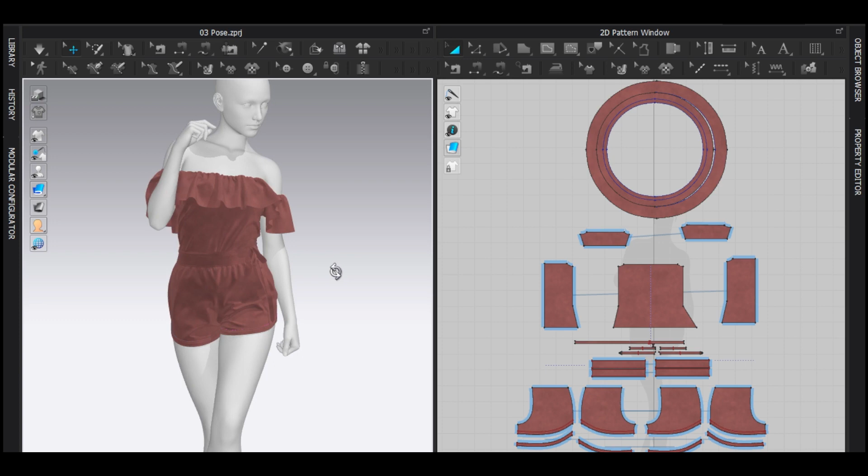This is the dress. This is for beginners, and it's gonna be step by step. So sit back, relax, and learn.

I hope you already have set up your avatar, and make sure the skin offset is below 1. I like to keep it 0mm.

I'm gonna start with the top design. As you know, probably every time I start with the basic block, and because this is for beginners, I'm not going to be using too much shortcuts. With the add point and split line tool, I'm going to add a point here and here.

And with the edit pattern tool, I'm going to select that and this and drag it down, and this one a little bit lower. So this is going to be my neck hole.

I'm going to smooth it with the edit curve point tool, and I'm going to smooth it here. So this is the armhole and this is the neck hole. And because the shoulder is kind of like a ramp, don't make this straight.

So I'm going to use the edit pattern tool and drag it down. Now select that, Ctrl C and Ctrl V, copy and paste, and in the 3D window, right click and flip normal. So you can see in the 2D window it just flipped, and place it there.

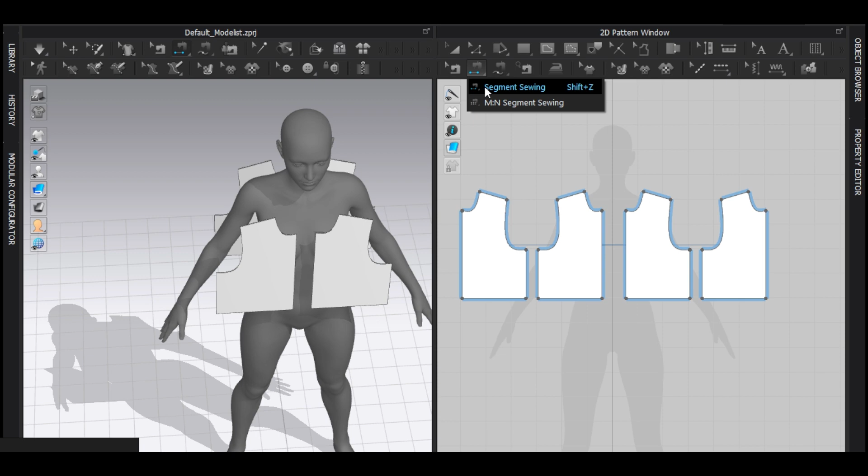Select both and hit Ctrl R to symmetric paste like that. It's very simple. Now sew it with the segment sewing tool. The front, you can sew it in the 3D window, in the back, on the shoulder, and just let it drape, and then sew the side seam, because sometimes the hands interfere with the fabrics.

Alright, so this is a basic simple block, and it just took like 2 minutes or something. Now I'm gonna modify it such a way so I can make this top, and it's really amazing because it has ruffles, and I love ruffles.

Anyway, try to make this a little bit baggy because I love a little bit baggy kind of top for this video. Alright, select everything with Ctrl A, and with the transform pattern tool just drag it like this.

You have to check your fabric though. If it is too loose, make it a little bit tighter. You have to make it a little bit balanced out. Don't make it too tight, don't make it too loose.

For this top design, this and this holes don't matter too much. Why? Because they are hidden underneath the shoulder ruffle. Still, I need to fix a little bit.

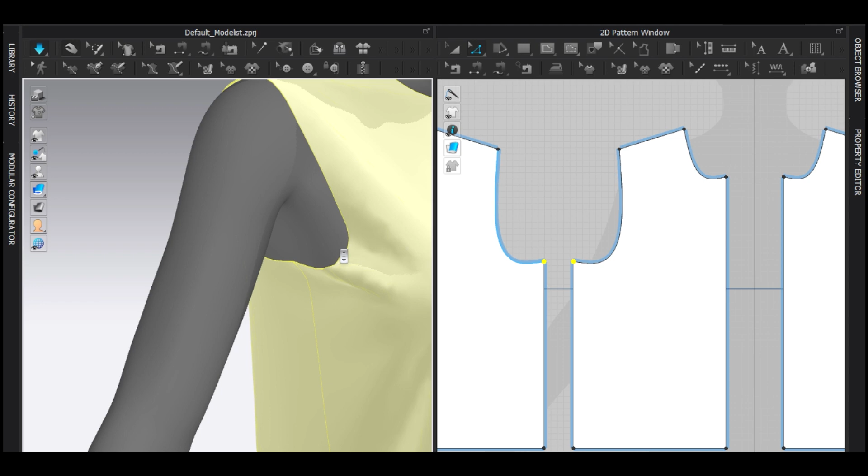Start with the armhole. So use edit pattern tool and just drag to select both and drag it up. And guys, you have to check your dress because it might be different than me. With the edit curve point, you can curve it as well as add curve point.

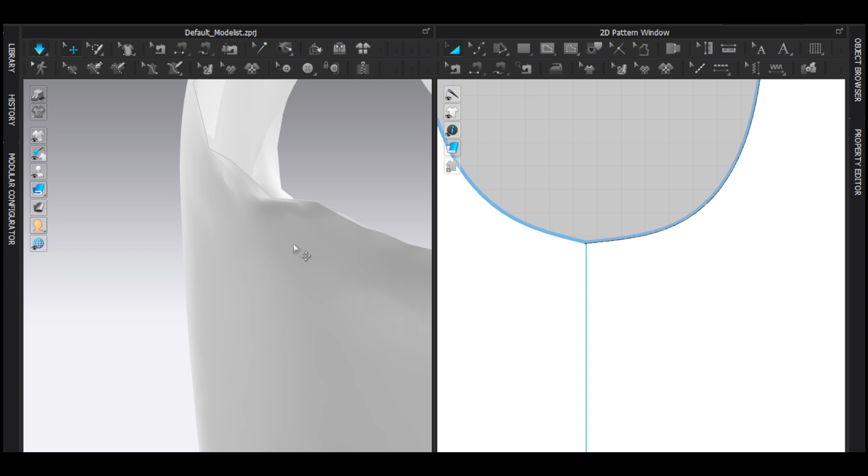So it's really amazing tool, use it often. Now just place it so it just snaps. You can see this area, it needs to be very smooth. Otherwise you will have this pointy thingy.

It doesn't matter here on this top, but it is a good practice to make it smoother. Just bring them towards this point and smooth this a little bit. I might make this a bit tighter, a little bit though, like this. And the back, fix it a little bit like this.

So I just used two tools. One is edit curve and edit pattern to edit this, and another is edit curvature to curve this curve point. That's simple. As you can see here, it's kind of tight.

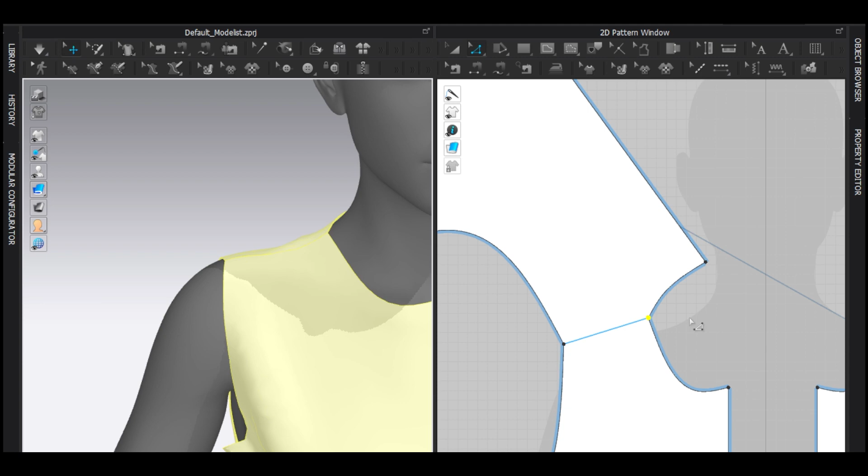It's really faster, believe me. And make sure this line should be a bit smoother. It doesn't matter because it will be hidden anyway, but still.

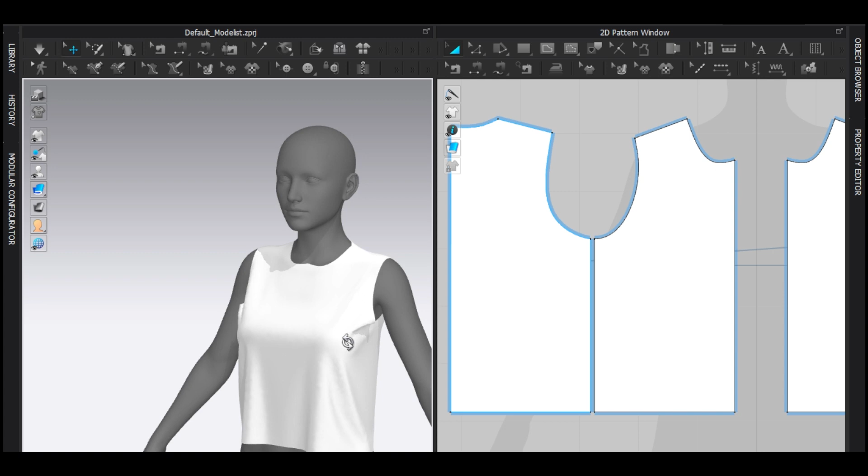Same thing to start, and I highly encourage you to use hotkeys. I will probably make a video of my hotkeys, but I don't think it's necessary. But let's see in the future, because with hotkeys you can make garments really fast, just really.

Now I will not worry too much about this area, the neck hole, because as I said again and again, it will be cut off and it will be hidden. I'm gonna start with the sleeve.

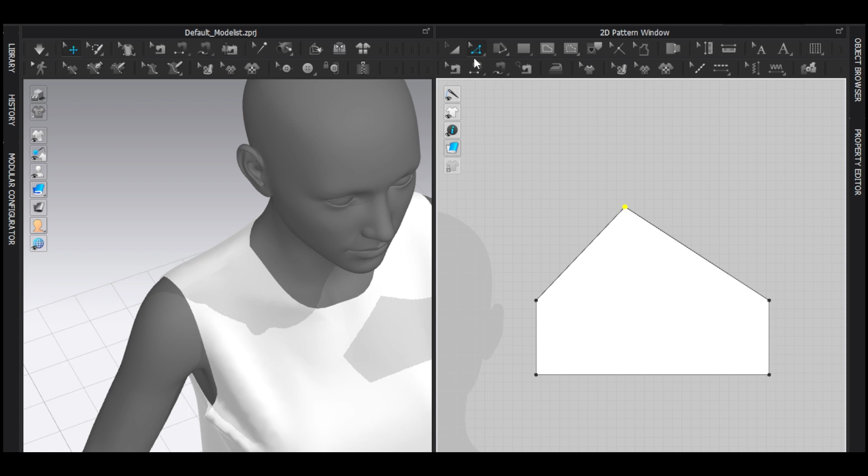So I'm gonna start with basic rectangle, and the way I make sleeves is just add a point near about middle, edit the point, drag this point with edit point tool, this one, edit pattern, and right click, convert to curve point, like this.

And with the edit curve point tool, just add a curve and drag it like this, and add another to make it a bit of volume. Same here.

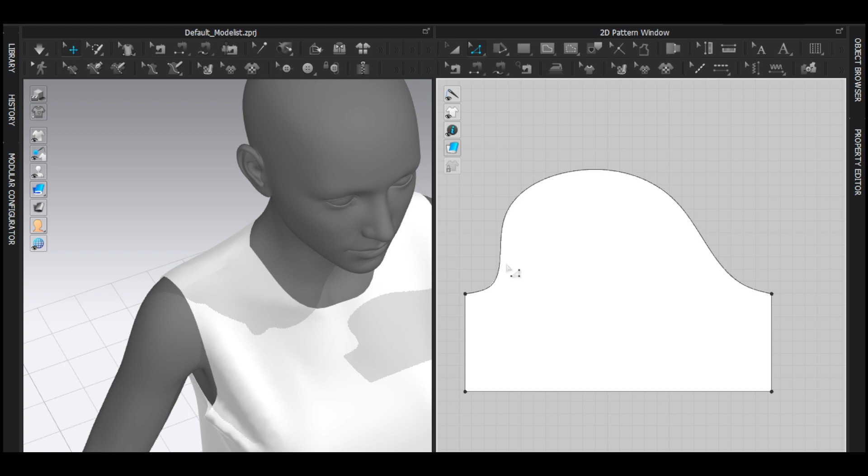You can always see the patterns, different patterns, like basic t-shirt patterns, basic sleeve patterns. Just see them and try to make them. It's more fun. I'm going to use the free sewing tool, which is here, and I'm going to sew it from this to that, and I'm going to hold shift and sew like this.

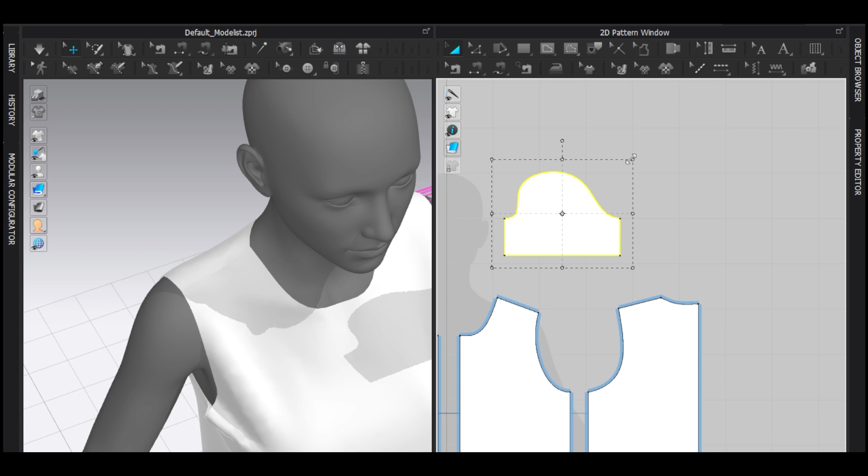It's very simple. With the edit curve point tool, with the edit sewing tool, you can see the measurements. It's minus, means it's smaller, so make it lengthier until it just matches the 0.2 millimeters. Perfect.

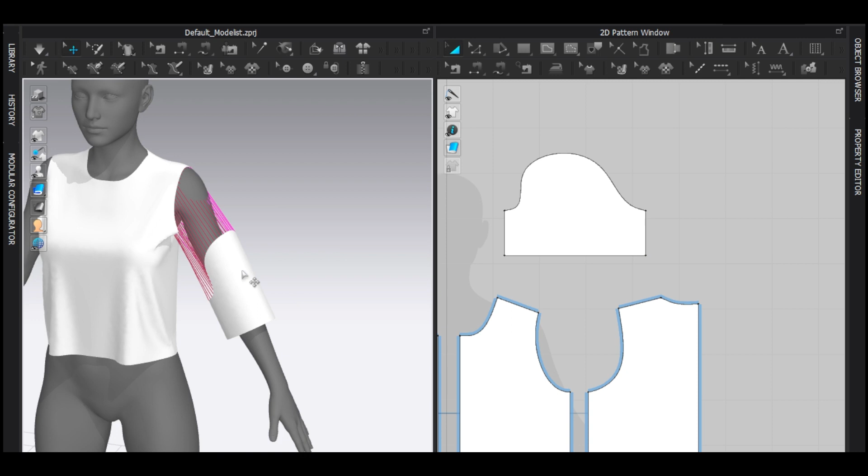Now select this pattern, and here you can find show arrangement point, or you can press shift F. I think it's default. Sew it and select that, hover over your mouse here and click it. It will just snap it there, and you can just turn it off. Just make it a bit closer and simulate, of course, and sew it here like that.

I did segment sewing tool, segment, sew there. Sleeve can be tough, but it's not tough. Yeah, you can adjust it by seeing this area. Again, it will be another video when I make pattern making videos in future. I will talk in details about that, but now let's just leave it like this.

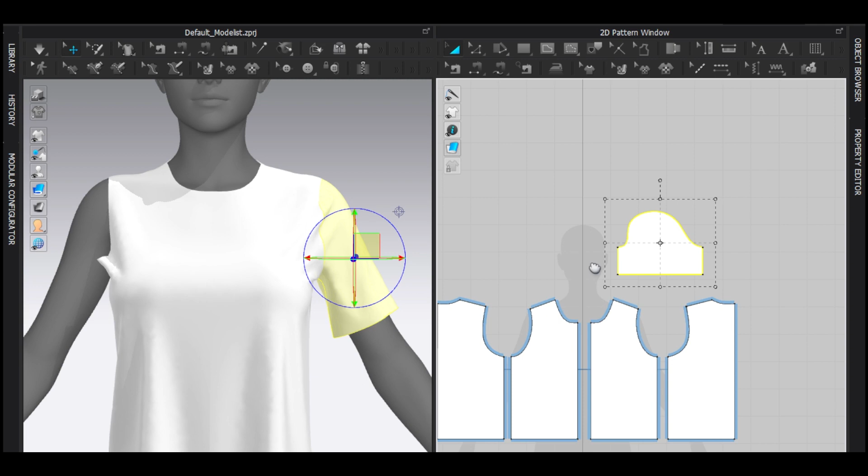This is the basic sleeve, and I'm going to select that, Control D to symmetric paste, and here just simulate. So it doesn't matter, because again it will be hidden.

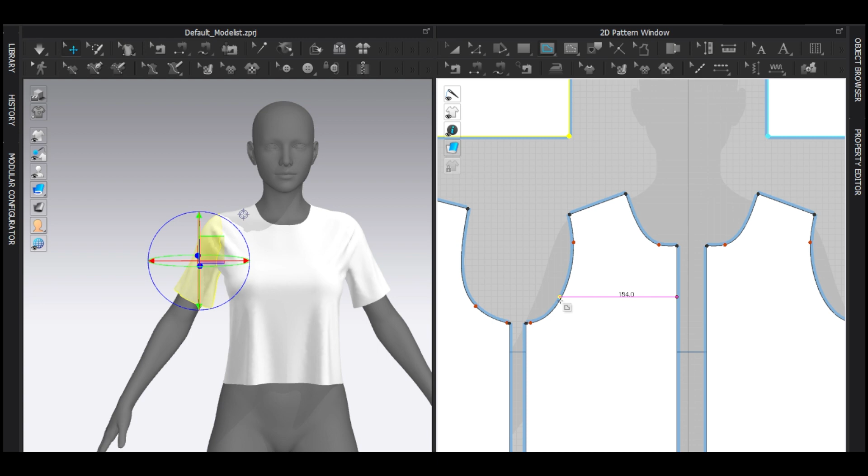Now what I'm going to do is I'm going to cut probably right about here. It's going to be tricky, but it's going to be simple. I'm going to use the internal polygon line tool and just cut it maybe around here, and just direct line that like this. This area, by the way, is this area, where you want to make the ruffles.

Maybe here seems fine. You can pull it up, you can pull it down. It's just a matter of preference. Now when you drag a line like this, select this line, right click and cut.

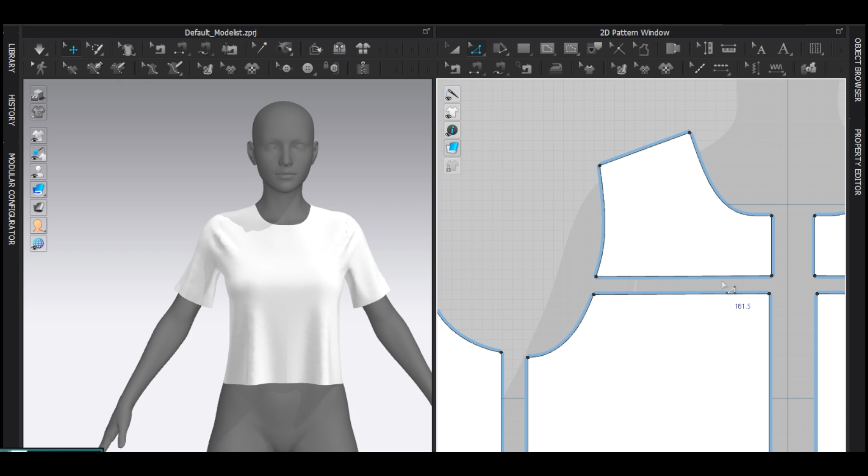Now when you cut a line, if it is already sewn, the sewing will also be cut. So this is the benefit. So here, as you can see, this sewing is cut like this.

On the back, I'm gonna drag a line like this, probably here is okay, I guess, and again cut, right click and cut. And you can just delete this because you don't need them. Now it looks kind of odd, right?

Yeah, because you also need to cut on the sleeve, and because you cut here, the sleeve sewing is also cut. So as you can see here, this is the starting point of the sewing.

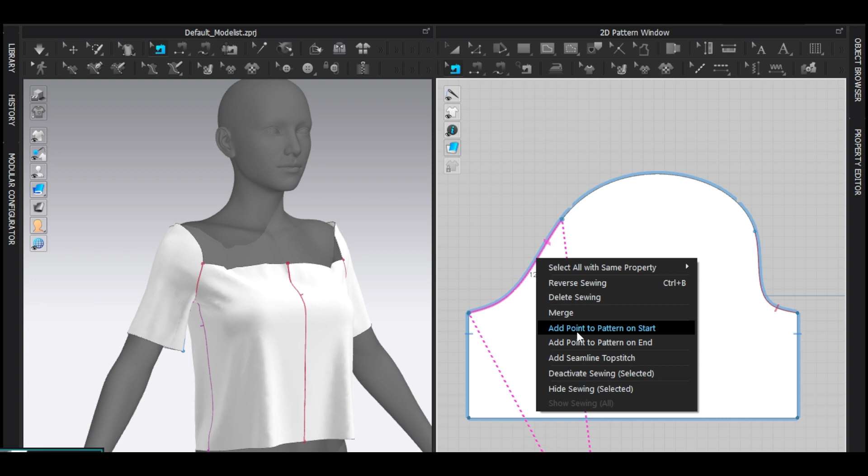So I'm going to add a point right about here. Right click on the sewing with the edit sewing tool, add point to pattern on start. Because it's start, so it will add a point right about here. And another here, as you can see, is the end. The long tail is the end and the short one is start.

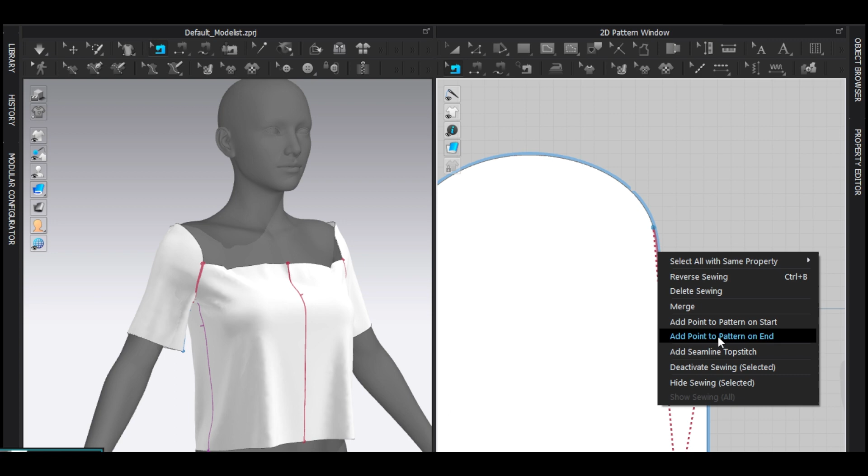So I need a point here. That means this is the end. Right click, add point to pattern on end, and it just adds 2 points like this.

So I'm gonna use polygon line tool. From this point to that point, I'm gonna just add a line and then cut again and just delete. So it is just amazing, as you can see there.

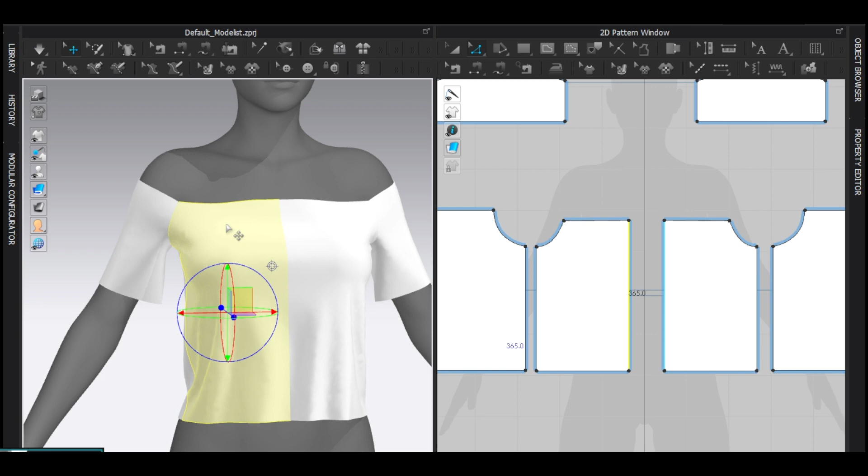It's not very tight, so I'm going to make it a bit tight on the front. Not too much, but a bit tight so it will hold there. And also the back.

Sleeve, I don't want that lengthy. And I'm gonna make it a bit downish so it can rest like there. This tension though you will have because of the arm position, so it's really recommended to use, like, the more A pose you have, the better the result will be. The more T pose you have, the worse result it will be.

So never work T pose in Marvelous Designer. Try to use A pose or very lower A.

And I'm going to make this a bit longer and maybe a little bit shorter. And I will not adjust this because I want this bit loose, so it will make this kind of amazing folds when I make the shorts.

Alright, perfect. That's good. I'm gonna add shoulder ruffle. It's very simple. You just need to add an ellipse tool like this and then adjust the location of it. Maybe a proper place like this, bit bigger like that.

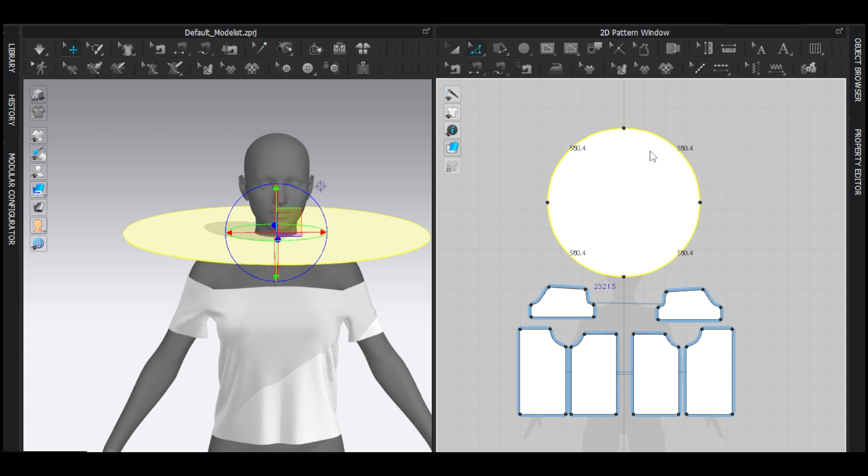Yep, perfect. Now select face, right click, and offset as internal line. It doesn't matter, maybe 50, and okay. Then right click and cut under this middle. So you will have a hole in the middle.

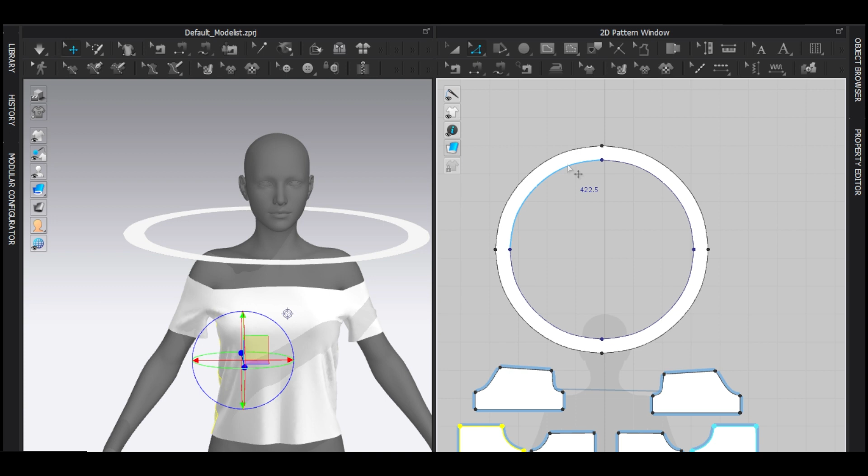Alright, quick tip. Just double select on one of the segments to select every segment when it's outside or inside. It's really better. You can even use here. It's really easy and fast. Now another quick tip, which is to use the transform point and segment tool.

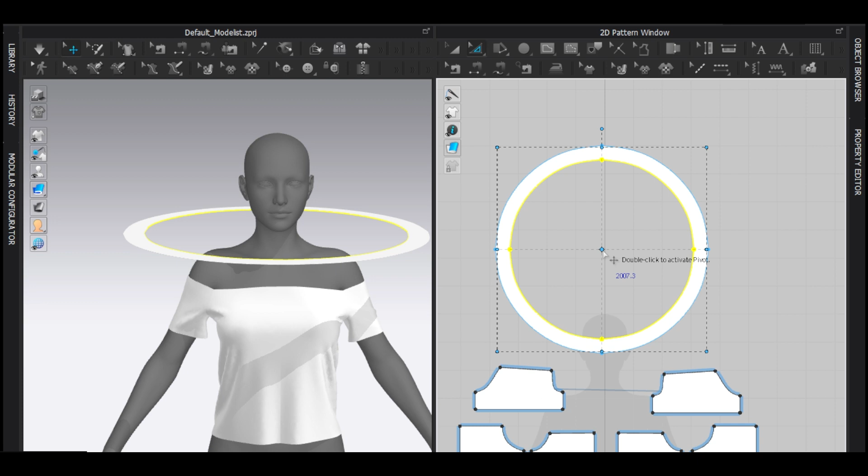So if you use the edit pattern tool, there's nothing you can do, you cannot make it shorter. So use the transform points and segment tool instead. If you do that with the other tool, it just makes it even worse, right? Yeah, so double click in the middle to activate the pivot, and now if you scale down, boom, it's amazing.

Now sewing time. Freeze this top, right click and freeze. Watch carefully. With the free sewing tool, you have to sew from here like that, and when you sew it like that, just check the sewing where it's going. It's from there, and as I roll my mouse, it just ends there. So you have to sew from here. You can see on the 2D window like this, so it just jumps from this to this.

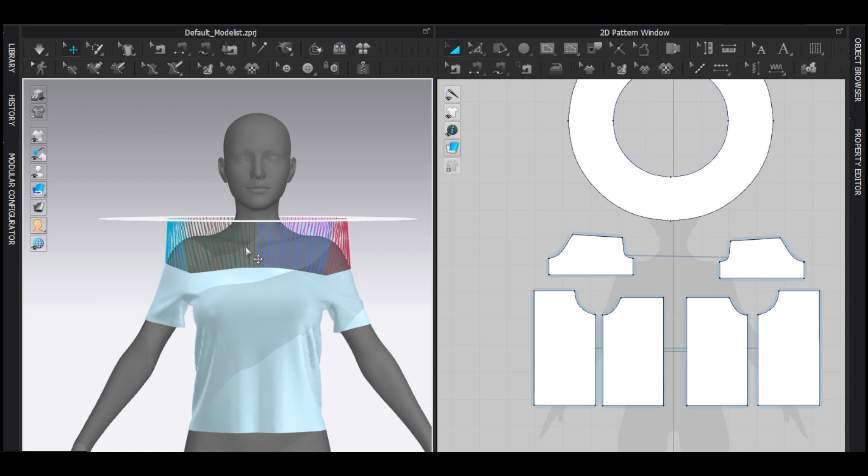It's really amazing, so you can just check it, like this in the front, and then again like this, and on the back. It's tricky, but it's simple. So like this, hold shift, like this, like this, like this, like this, like this, and like this. Make sure every sewing thread is straight. If it's not, if one of the sewing lines is reversed, it will show you like this and it will be chaos. Just trust me. And of course simulate, so you will get amazing ruffles.

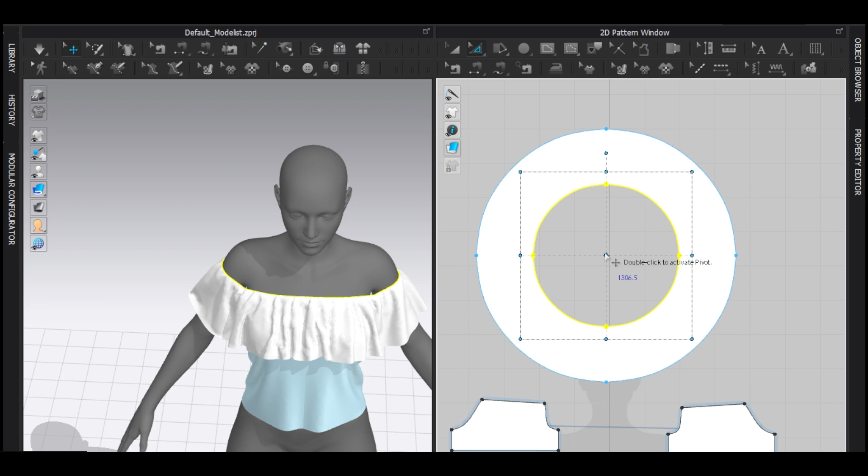About the ruffles, there are some easy tricks you have to understand. The bigger you make this inner circle, the more gather, the more ruffle you will get. So yeah, anyone can know that. I'm going to make it a bit bigger, it will be more gathered. The more means better, yes.

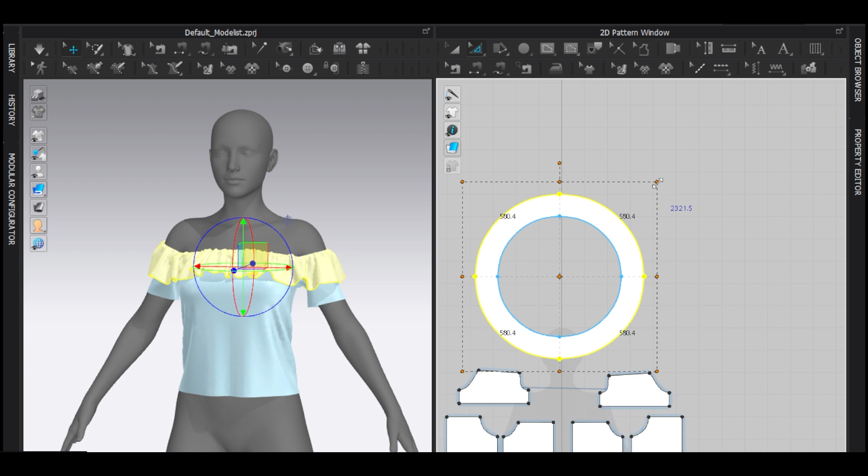Now I really want to make these ruffles a bit bigger so it will hide the sleeve. So I'm going to select that with the transform point tool, just double click in the middle and then drag it up. Remember to double click, otherwise it will be really bad. And let it drape. There you go.

So select everything with Alt A, Control A, and unfreeze everything, and then simulate again. So it will just release a bit of fullness there.

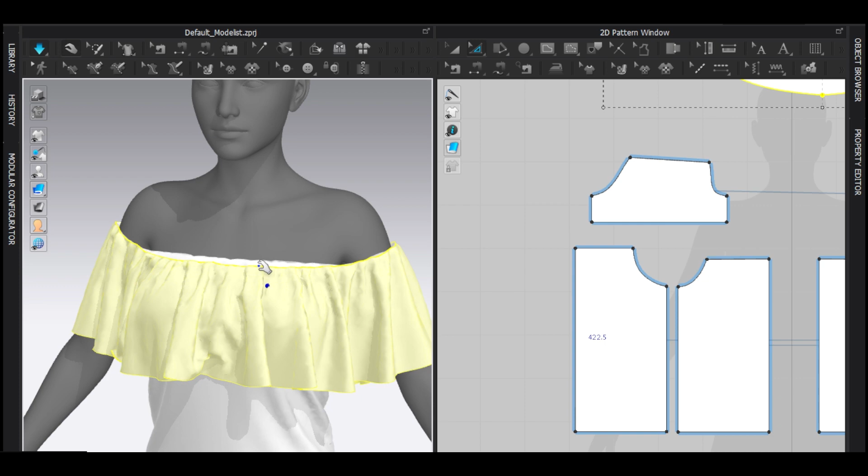Don't make it too loose, by the way. If you get this kind of problem, it's probably because the dress is not very tight. You have to make it a bit tighter so it will hold the shoulder and it will not drape too much down. Yeah, it's not too much, so it's better. If you want, you can add elastic here, but I don't recommend it. Just make it a bit tighter, it will be fine.

Let's work on the shorts. I'm kind of bad at making pants, but I'm learning, and it's not very bad, although it's a gathered shorts. Anyway, before making shorts, first select everything and freeze it, and make sure the layer of all these patterns is -1 or below 0.

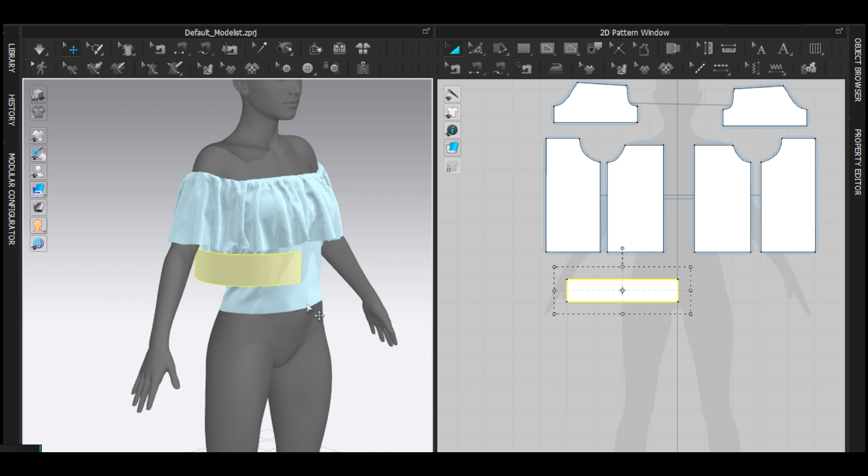And then I'm going to add a waistband, just like this, a single rectangle. Again, with Shift F, the arrangement point, select this waistband and click on the waist so it will just snap there. Control D to symmetric paste and segment, so front like this and back like this, and of course simulate.

But guys, if you find this problem - I didn't find this here - sometimes here, because it is not merged, this thing will look a bit odd. If it does, just right click with the edit sewing tool and merge. I'm not going to do that because it's fine.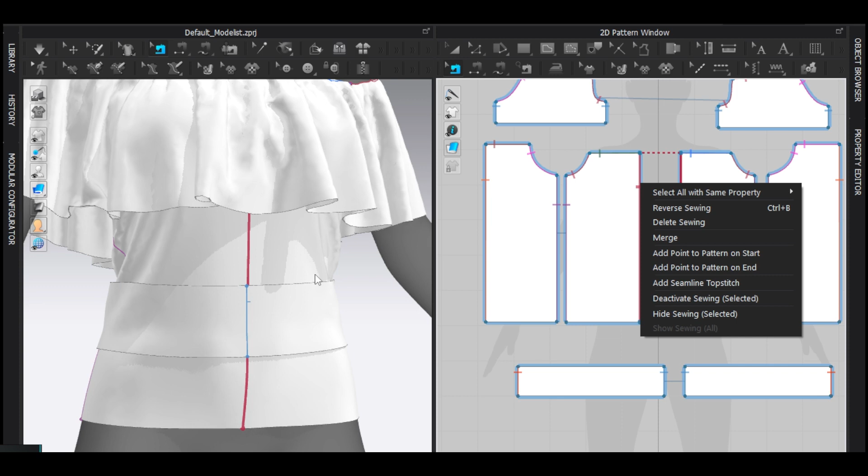So I think I'm going to make it a bit tighter on the back. Yeah, I think that's it. I really love these gathered folds, so it's great.

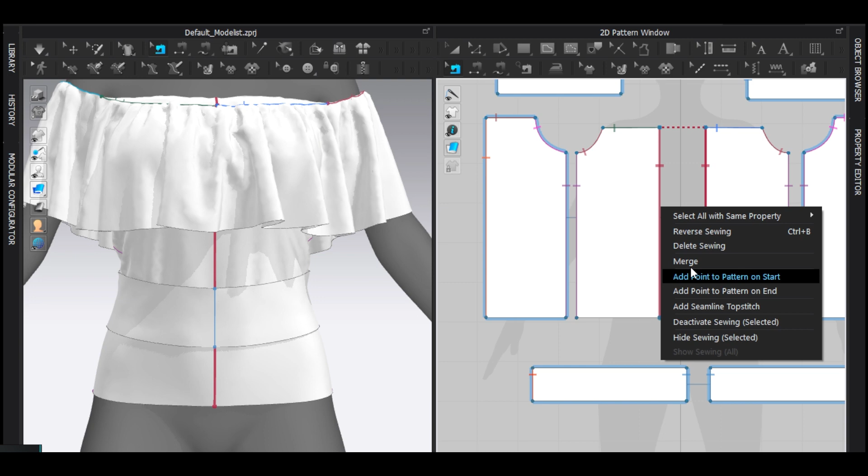I might merge this, because before merging, right click and remove linked editing and then merge it, and then delete this, because I want this as a single piece of fabric. So I might make it a bit tighter. I'm just experimenting with you guys, so like that. It looks good for now.

And again, freeze everything except this one, freeze this one also. The waistband is a bit wider.

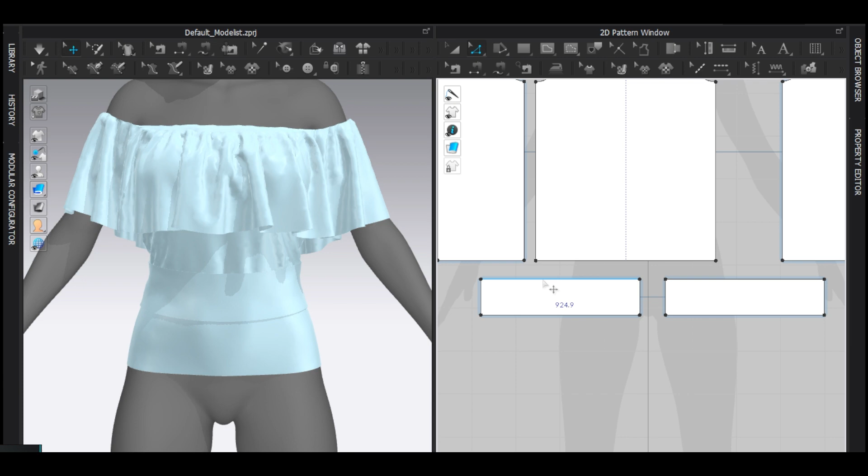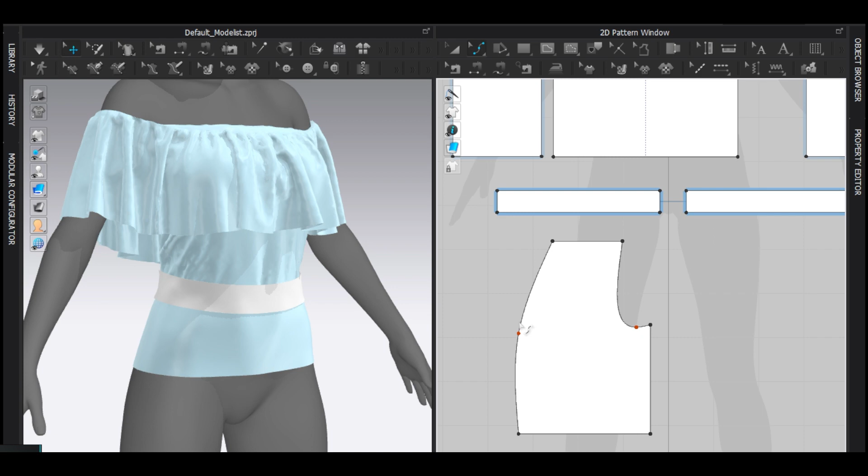Now, to make a pattern of the pants, it's similar to the top design. Just add a rectangle, add 2 points like this, drag it down like this and also like this, and just curve it, make this a curve-to-curve point like that, and make this a bit inward and this one a bit downish, and this one probably a bit narrower and a bit smooth, and maybe like this or like this. Now this is a pants pattern.

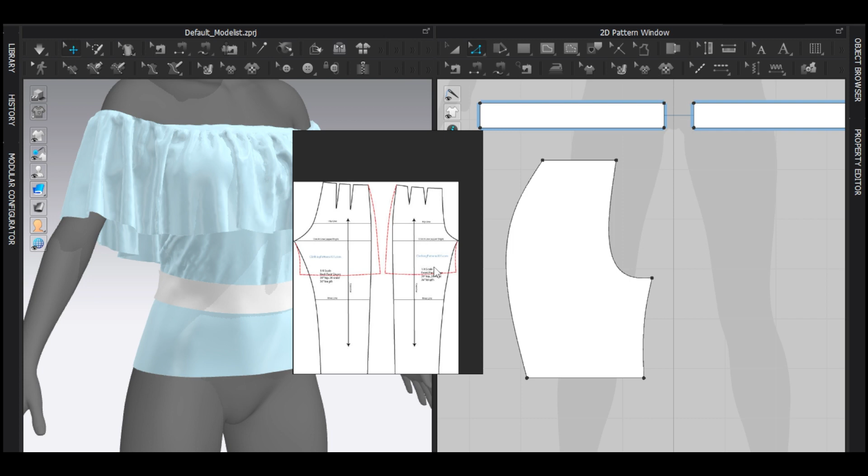Forget about that, there are darts. Just see the silhouette of how it is looking and try to mimic that.

Once you make it, Control C and Control V to copy and paste, and in the 3D window, right click, flip normal, and position it behind the character. Just adjust this location a bit, and Control R to symmetric paste like that.

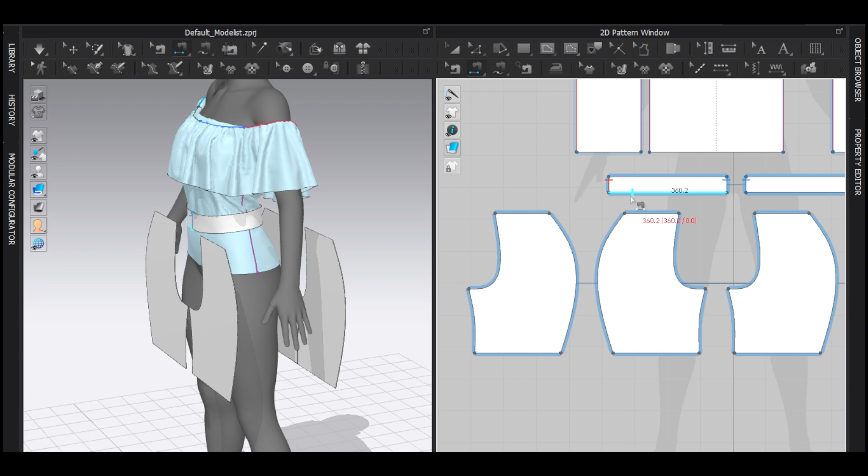So it will be a gathered shorts because it's easier. I'm going to make this a bit wider, should be wider than the waistband length. Now with the segment sewing tool, just click that while holding shift, click this and click this.

Probably freeze this and simulate. So yeah, there is no gather, so I'm gonna make it a bit wider because I need a lot of gatherings on that area, and it's not still. Yeah, I'm starting to see gathered a little bit, maybe a bit more.

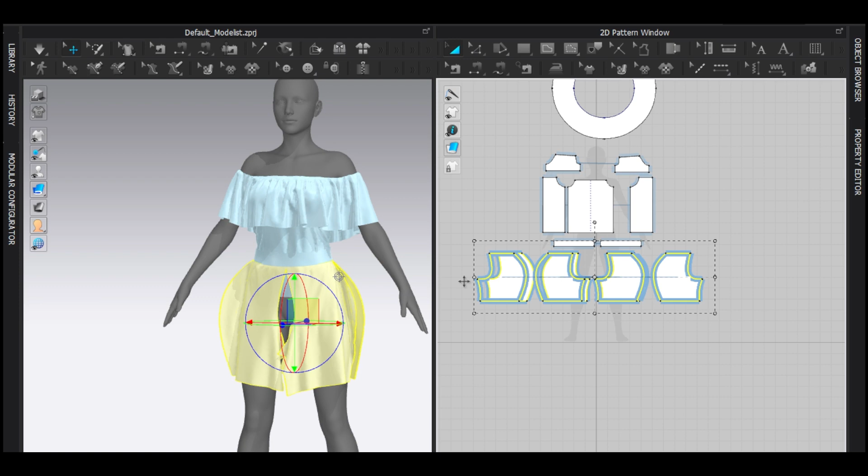Yeah, maybe like that for now. You can adjust this if you think the pattern looks a bit weird. You can adjust those, there's nothing wrong with that. You have to make this a bit wider to have gathering.

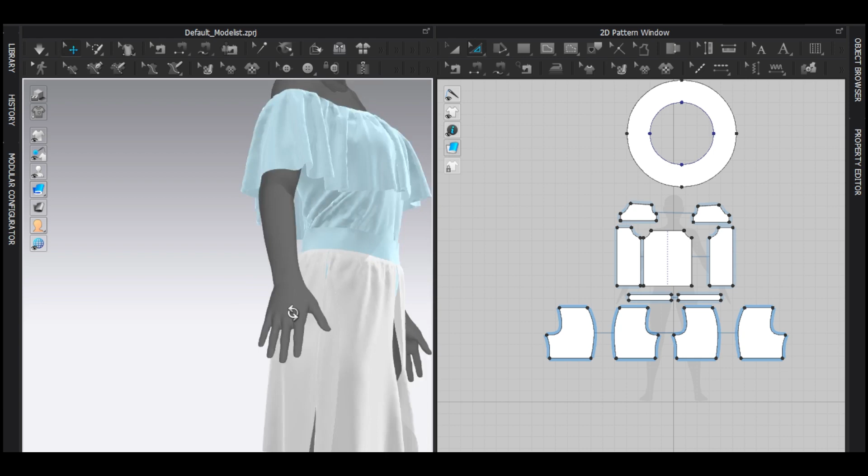Yeah, let's see how it's looking. Now I'm gonna sew it, segment sew it like that and like that, and simulate to see how it's looking. First of all, it is way too downish.

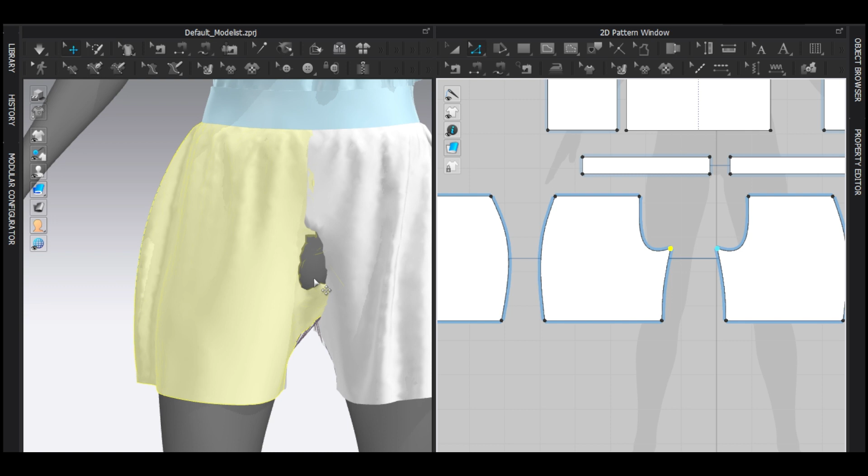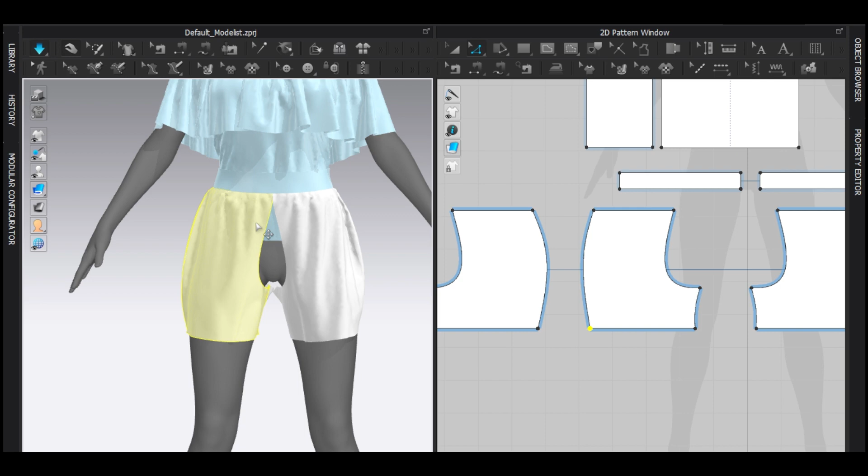Pay attention to this area, don't make this over this area, just try to be mindful. There should be a bit of gap on this area because you will not want to wear a pant which is way too tight. Even especially on this area, it will be painful. So I'm just adjusting side to make not that fluffy looking pant.

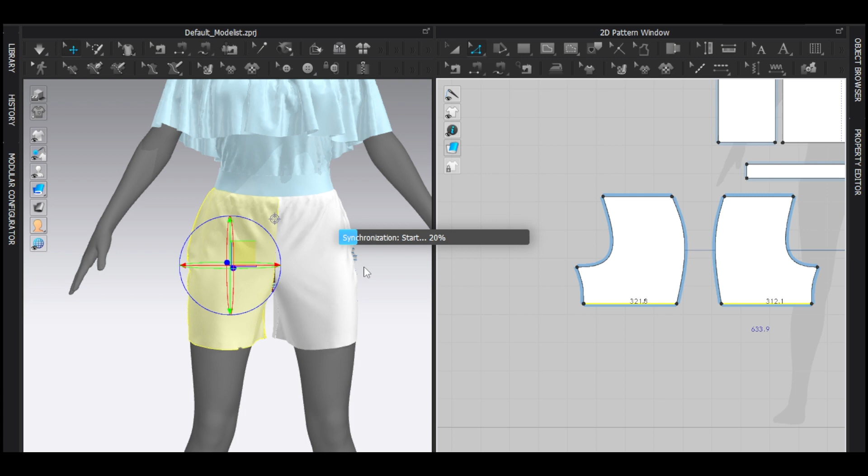Now select, sew this and sew like this. Simulate and see how it's looking now, and then I'll decide what to do. Let's make it a bit down and this one a bit down, and because it is gathered, make sure this area looks good and make sure this sewing it's good or it's the same.

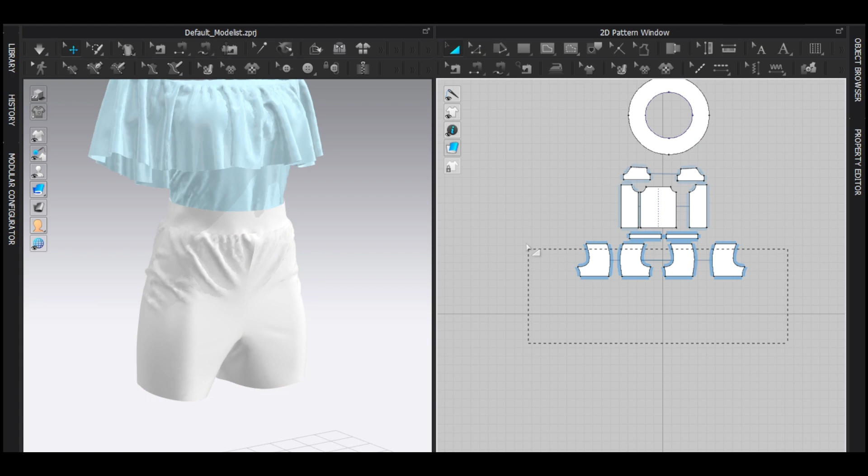All right, unfreeze that, simulate. Yeah, it looks kind of odd, but it will be better, trust me. I might bring this whole shorts a bit down, freeze everything like that, and probably we'll just adjust a bit like that. You have to be concerned on this area when you make pants like that.

Now what I'm going to do is add a pose, and then I'm going to add details because pose will make the dress significantly better. See, I told you. Now there's one thing to consider, which is the fabric preset.

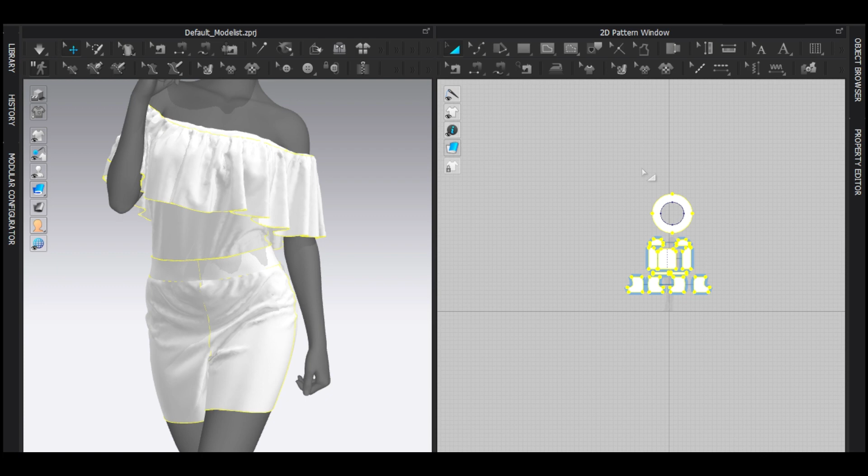I want to make this, well, let's make maybe, I don't know, maybe a stiff fabric like taffeta. If I find like this is very stiff and it will probably look odd. Let's check it. It will give you, it's just like a paper-like fabric. It will look very bad.

Anyway, enough joking around, I'm gonna use maybe 50 poplin. Let's add this, it's a bit lightweight, but let's see. Yeah, I think it looks good. This one is not very stiff, but it's lightweight, that's why it's just floating like that. But I like it, it's good. I mean, when I reduce the particle distance, you will see the magic.

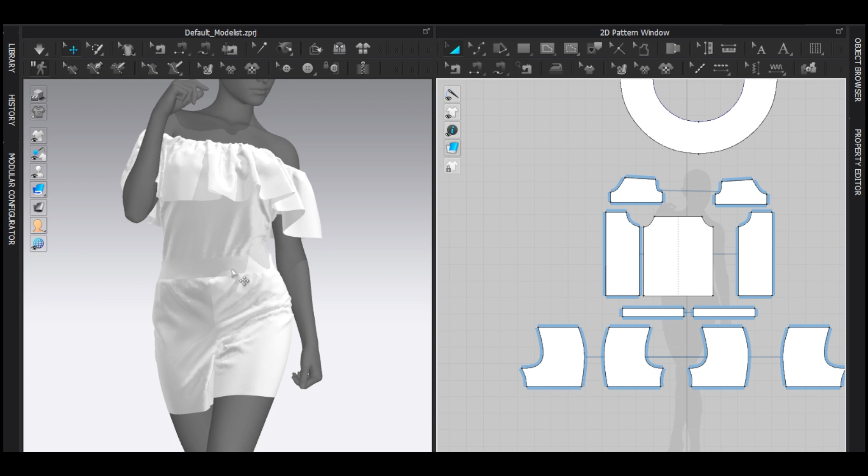Now let's make the waistband a bit better. You know how, if you watch my previous video. First, just merge it.

Before merging, always try to remove linked editing and then merge, and just delete this one. Don't worry, the sewing will be there. This is the magic of virtual fashion.

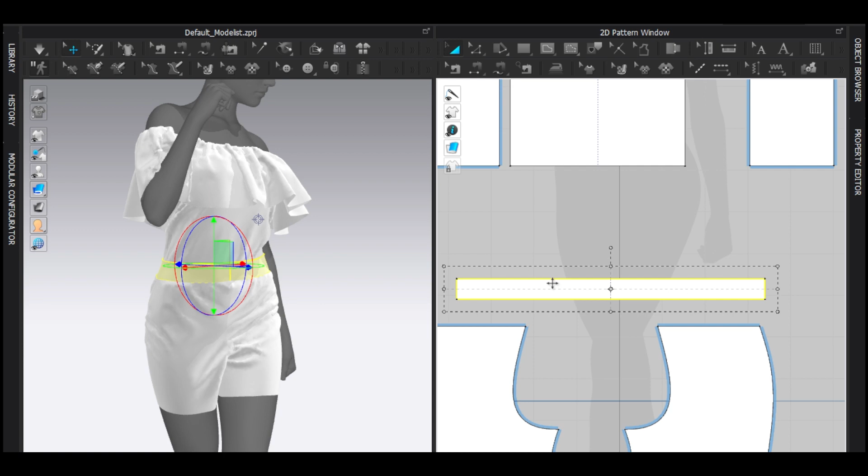All right, right click and layer clone over, so you will have another fabric on top of it, and there's a couple of things you have to do. First, right click and remove linked editing, and then delete the sewing which comes with the edit sewing. Now segment sew top with top and bottom with bottom, and like this.

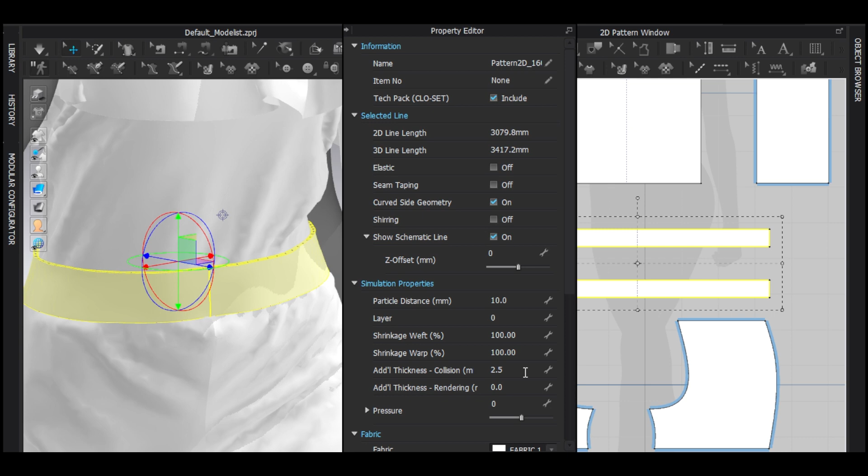Select both and decrease the collision thickness, maybe 1. 2.5 was way too high, but it depends on the, well, there will be a problem, and I honestly don't know why CLO does that. But anyway.

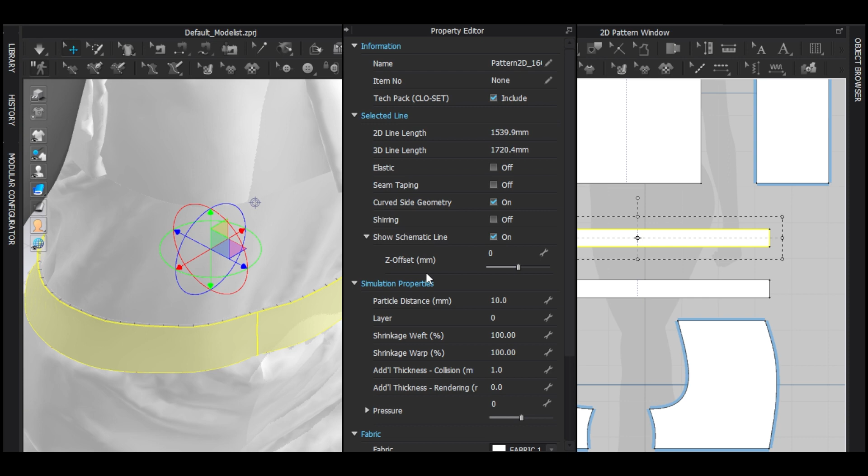Select that, first check this fabric, which layer it is in, is 0, so it is on top, make it 1. I really don't know why this does that. I mean, it will just freak out so much and it just ruins my happiness. Yeah, and now we can just make it 0, 1 like that.

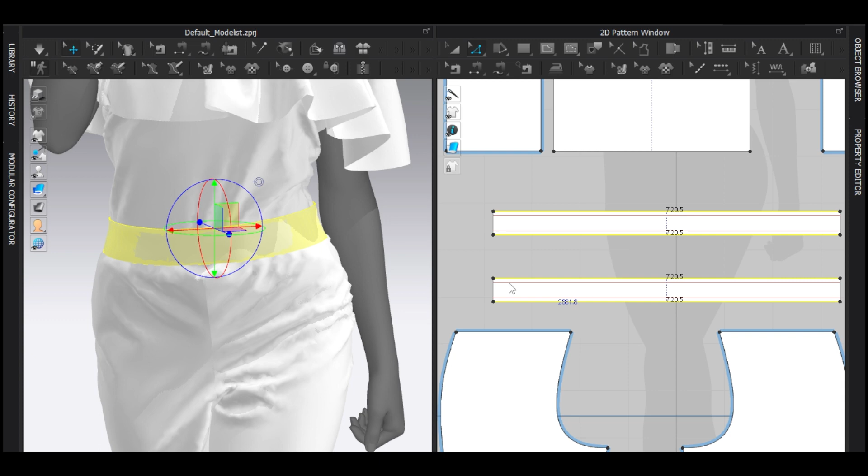Now select this, right click and offset as internal line, maybe 5, you can see here, or maybe 6 or 8. 8 looks good. And then sew it on top and on the bottom, and you will have amazing stitches.

You know, when you actually sew it, it will give you the stitch. So this is the stitch. Now you will not see it until you reduce the particle distance so much, maybe 3, and now you will see it very clearly. See, it's great, right? Yeah.

Well guys, I will skip this ribbon because I will be honest, I copied this from one of the CLO 3D's videos.

You can just search how to make a ribbon in CLO 3D or Marvelous Designer. It will be similar, because this kind of thing I really don't like to make in virtual, since it's more tricky than in real life. I want virtual fashion to be simple, not tricky. In the future, if I find a simpler, non-tricky process of making ribbons, I will show you, but not now. Go ahead and watch the CLO 3D official channel.

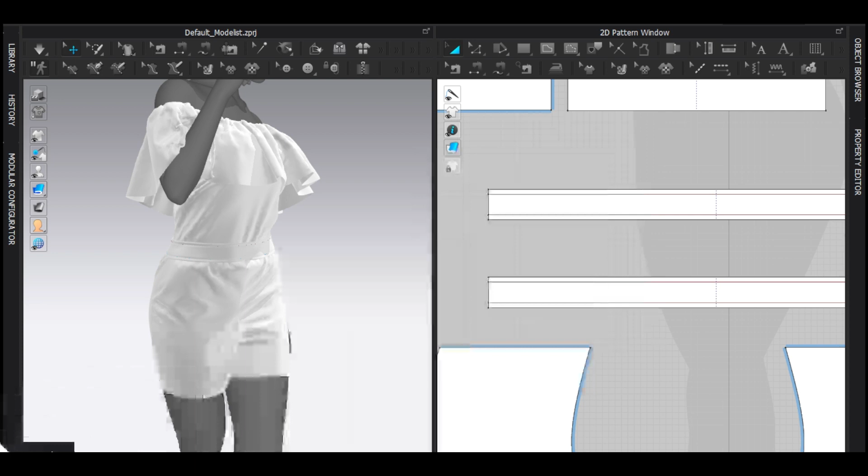As you can see, this shorts has an interesting shape on this area, so I'm going to make it. It just makes it amazing. So if you don't know, or if you don't find which fabric it is in the 2D window, you can always click it.

It will highlight, but it will also give you a blue dot in the 2D window, so it's amazingly helpful. Select both and just drag it up like this. Don't make it too much, maybe like this, and simulate. Maybe a bit upward.

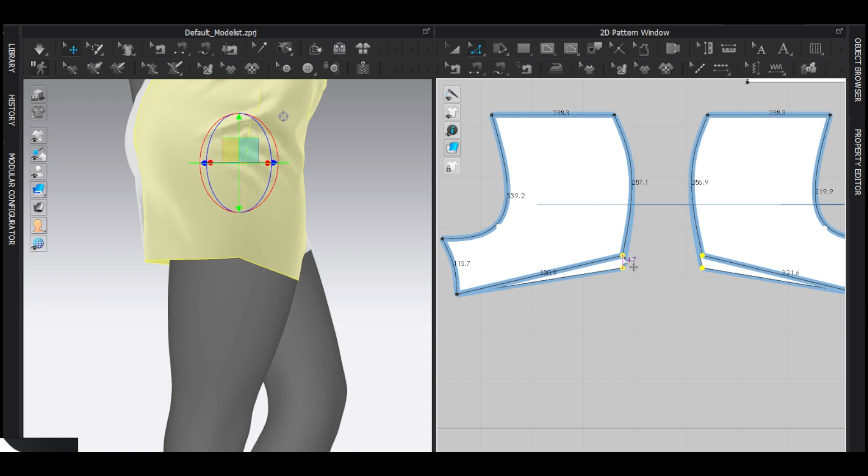You can also make a smooth line, but I think the triangle shape looks just amazing, so I'm going to make it triangle, maybe a bit upward. It gives you an amazing character to this dress.

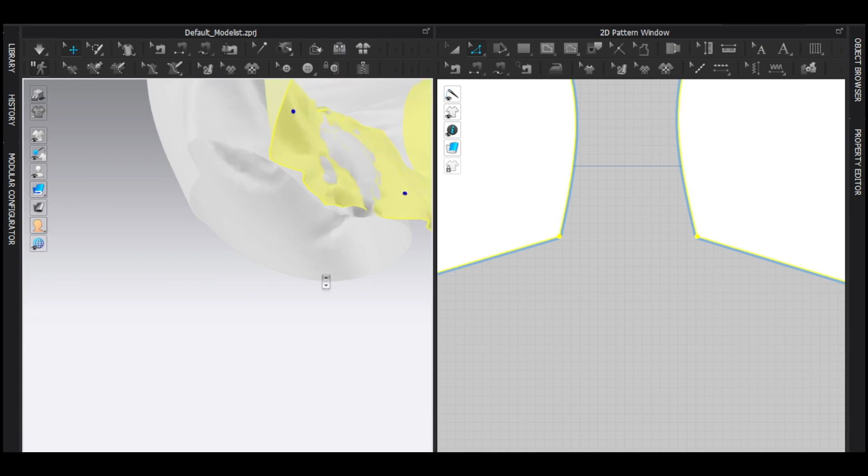Now, this is tricky because the leg is so close, I cannot work properly there. Made a bit bigger by dragging it down. I think, yeah, I think that is the case.

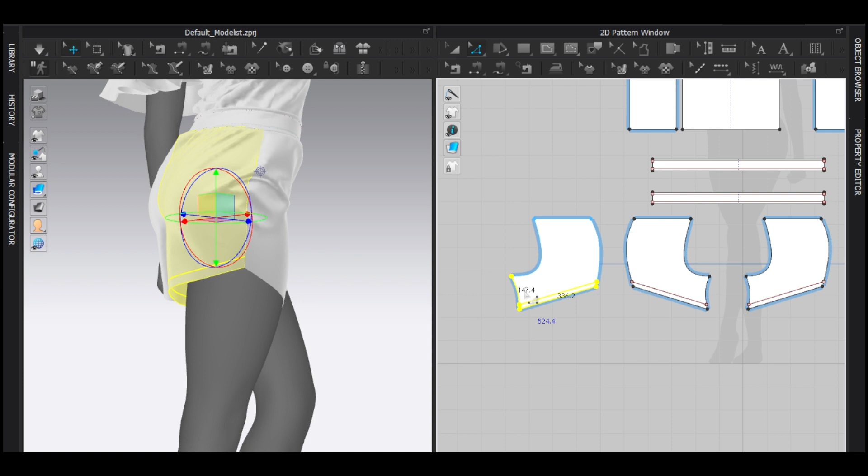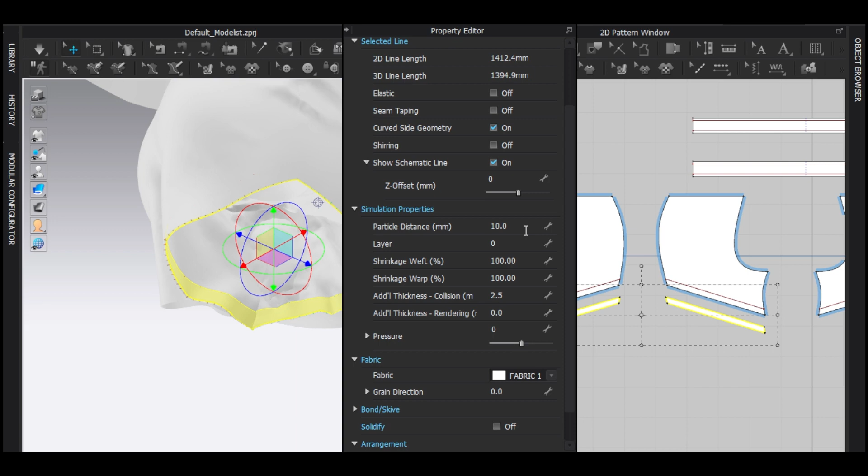Now select that and this. Select this, select that. With the magic tool, this trace tool, right click, trace as a pattern, sew it top and bottom, and of course superimpose over, right click and superimpose under. Reduce the collision thickness and particle distance, and simulate and hope for the best.

So now sew here and here. Make sure the sewing is not reversed, that would be another problem. Just trust me, I have faced a lot of problems because it was kind of a stupid mistake.

Select these two, right click, set as internal line. Maybe 5 would be good, or 4 maybe. 4, and here also 4, and this one also 4. So the top, so the bottom, and same thing here. I forgot there.

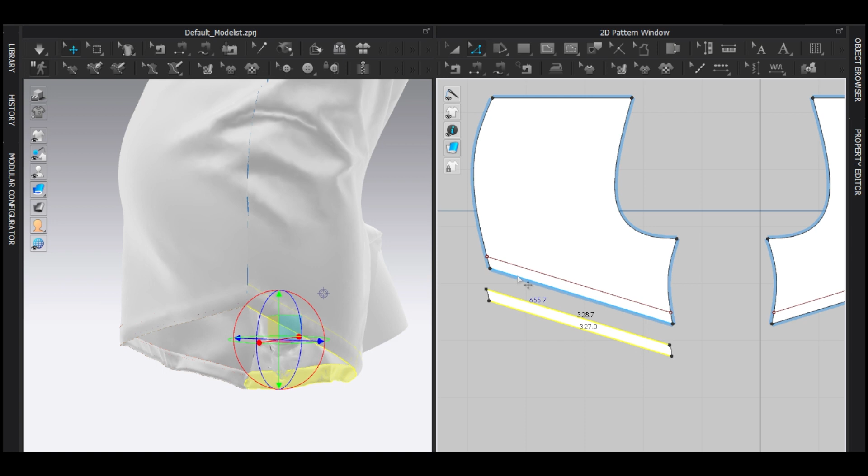Like that. Oh, it is reversed. So select that, and reverse direction, and sew it like that.

Simulate to see the finishing stitch. I'm not satisfied because it should be on top, not beneath that. So I might superimpose over, simulate. Select both this pattern and this pattern, Ctrl D to symmetric paste, and again superimpose over.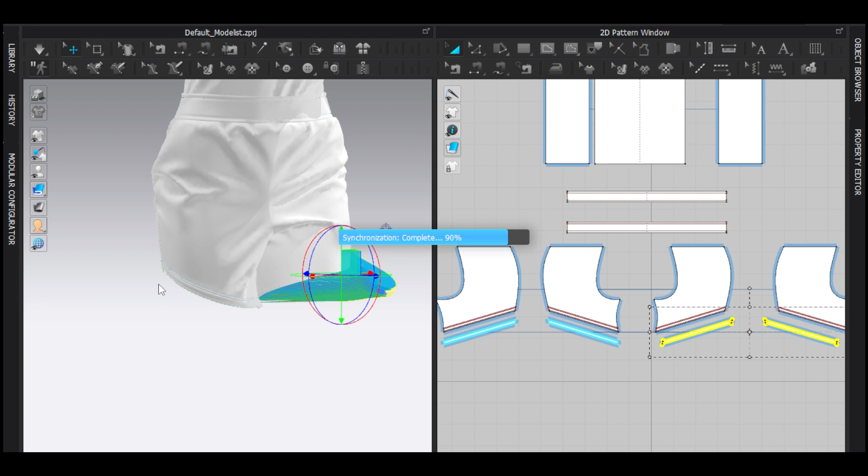So we'll have amazing finishing on this area. Yeah, like that. Don't look at this area, it's just weird.

Now select this top design and maybe probably 7. It depends on you and also on your hardware.

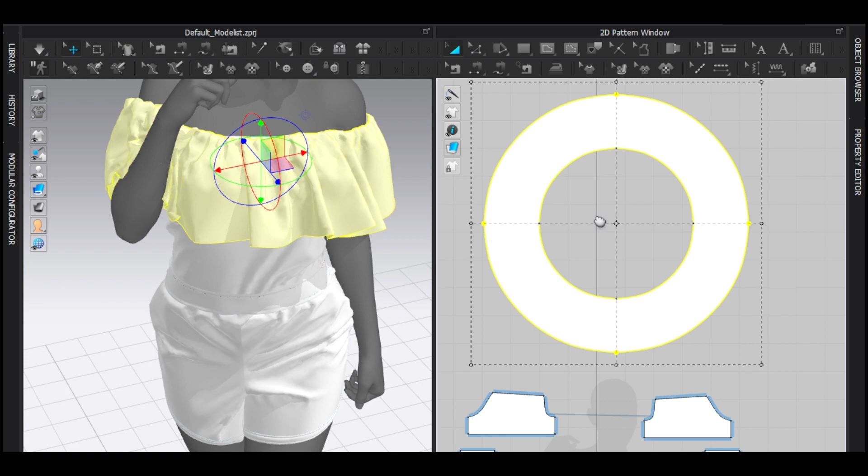There's one last trick for this amazing shoulder ruffles. As you can see on this area, it will need a lot of polygons because it will have the most gathering here. The rest doesn't need that much, so it's really not a wise decision to make the entire pattern maybe 2 or 3 — it will significantly slow your computer down because this fabric is really large.

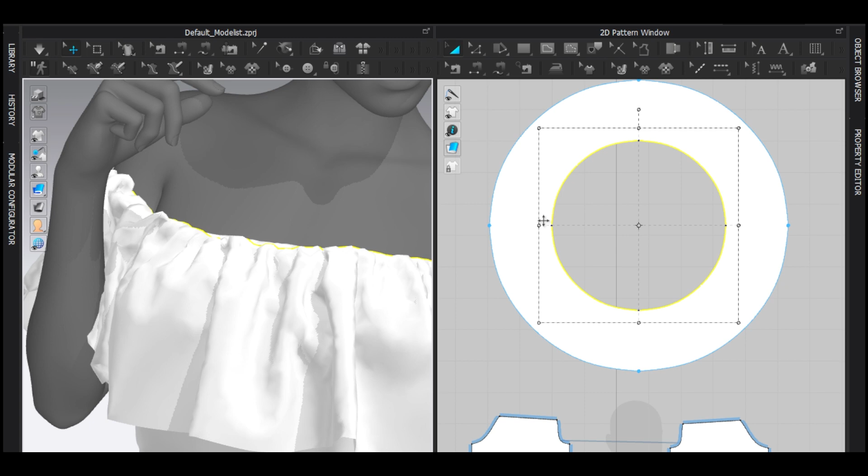What I usually do here: I select this whole segment, select this entire segment, right click, offset as internal line, maybe 50, reverse direction of course. This area will have a lot of polygons, while maybe on the 70 or a bit bigger on this area will be less, and this area not so much.

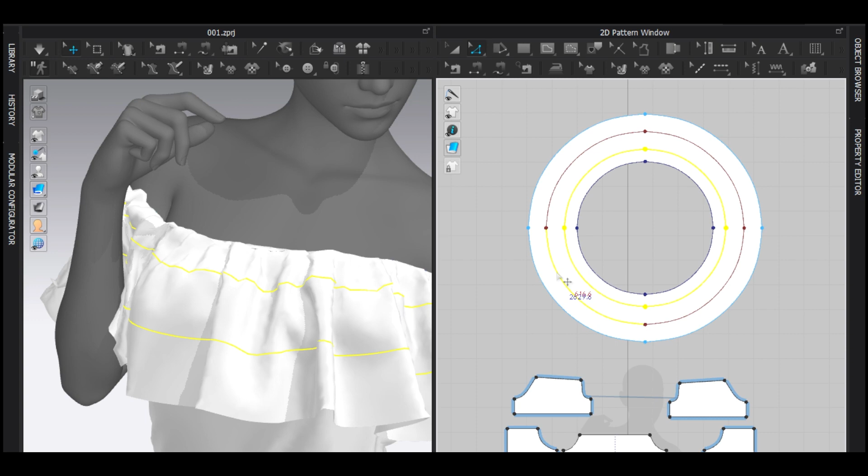And then cut and sew. Remember one thing in Marvelous Designer: when you cut and sew, this is the exact same thing as it was like this. It's the same thing, so do not hesitate to cut and sew.

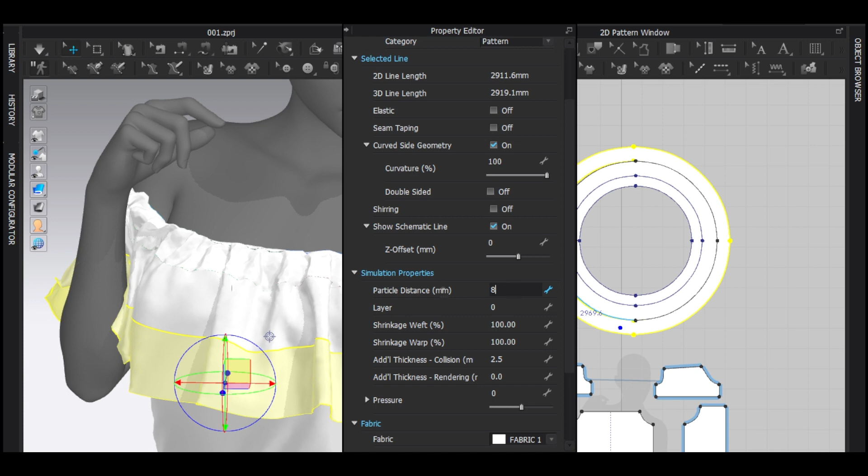This part I need to be 2 because it will give you the amazing buttery smooth look. This one maybe 5, and this one, yeah, 10 is probably okay, but I will give it 8, and simulate. You will see amazing details on the shoulder ruffle because ultimately it is the focus point and it needs to be amazing. Just let it drape and see the magic.

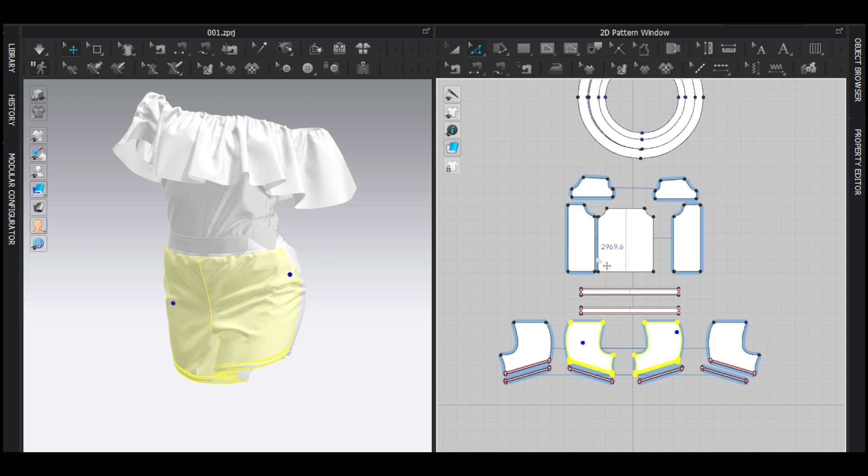Here it is, as you can see, this looks fantastic. I love it. You can also make this pant pattern maybe a bit lower because I see a bit janky folds. I don't want them, so 5. And also here, I really don't want to see any bad folds, and simulate, so it will be a bit better. Alright, this is the final result.